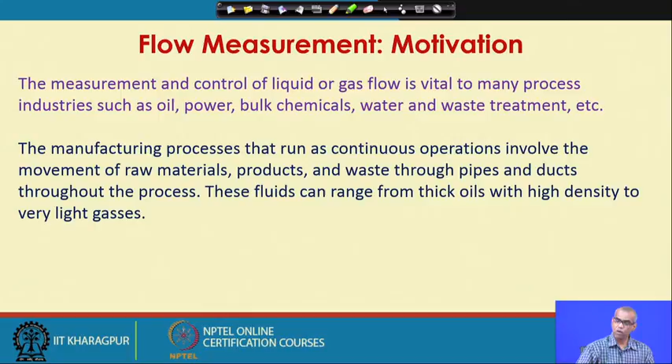The manufacturing processes that run as continuous operations involve the movement of raw materials, products, waste through pipes and ducts throughout the process. These fluids can range from thick oils with high density to very light gases. It is important that we know exactly how much fluid is passing through a point at any given time, for a safe and economic operation.

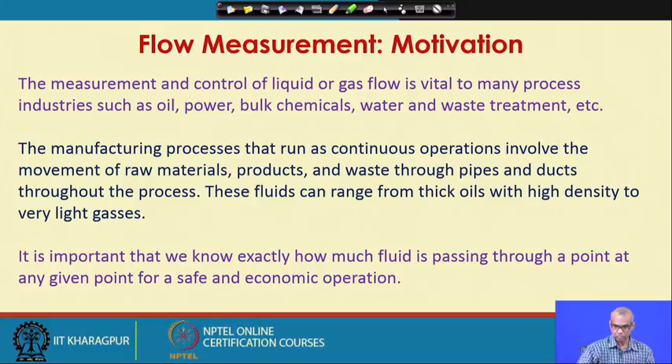It is possible that some flow measuring instruments work better with some groups of fluids and less well with others. It is obvious because you will be handling fluids which vary from very thick to very light. So there will always be flow measuring instruments which work better with some groups of fluids and less well with others. In this week, we will learn about various flow measuring instruments and their applications.

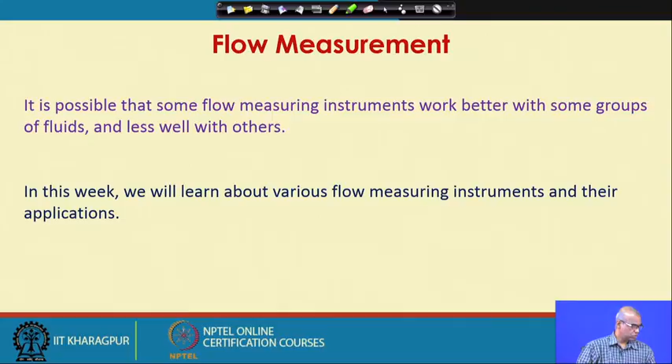So today we will classify various flow measuring instruments, and then we will talk about an important principle on which a certain class of flow measuring instruments are designed. This is known as Bernoulli's principle, so we will talk about Bernoulli's equation.

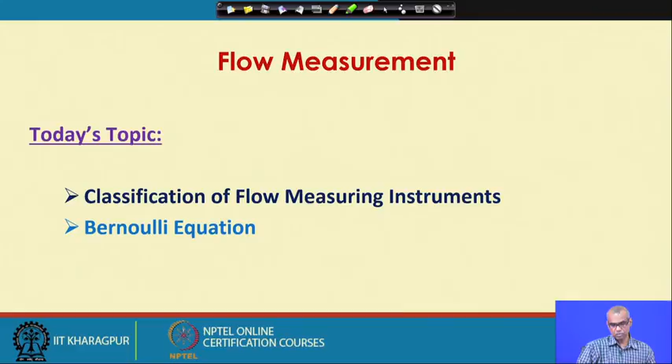Broadly, I classify the flow measuring instruments into two categories: one is flow of fluids in closed pipes, another the flow of fluids in open channel. Of course, flow of fluids in closed pipes finds many more applications, and under flow of fluids in closed pipes, we have classified various flow measuring instruments under 5 different categories.

First, constant area variable pressure drop meters. Under this, we will talk about orifice plate, venturi tube, flow nozzle and pitot tube. Then we have variable area constant pressure drop meter, and we will talk about rotameter.

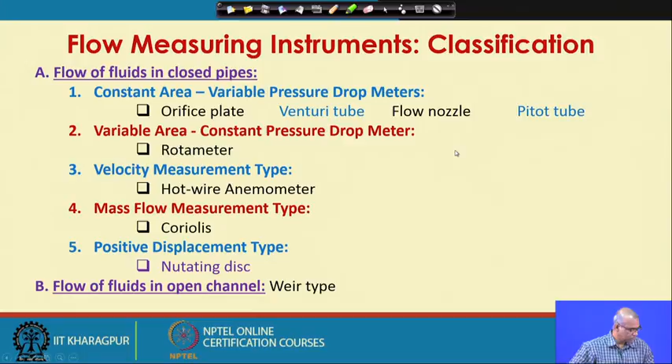Let us go through some basic principles. First, average rate of flow. In a flow through a pipe, the velocity of a fluid is the rate of flow of fluid particles in the pipe. The speed of particles in a fluid flow varies across the flow. At the walls, the velocity of the liquid particles is practically 0, and the particles have maximum velocity at the center. Thus, the average rate of flow is used in flow calculations.

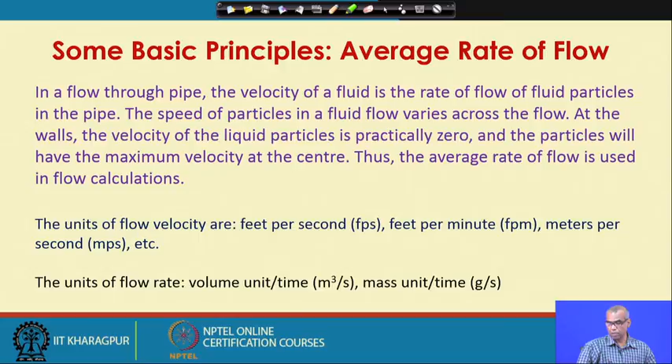The units of flow velocity are, say, feet per second or feet per minute, meters per second, etc. The units of flow rate, if it is volumetric flow rate, we will express as volume unit per time such as meter cube per second. If it is mass flow rate, we will express in mass unit per time such as gram per second.

Next we will talk about types of fluid flow. In laminar flow, the fluid travels as parallel layers known as streamlines that do not mix as they move in the direction of the flow. If the flow is turbulent, the fluid does not travel in parallel layers, but moves in a haphazard manner, with only the average motion of the fluid being parallel to the axis of the pipe.

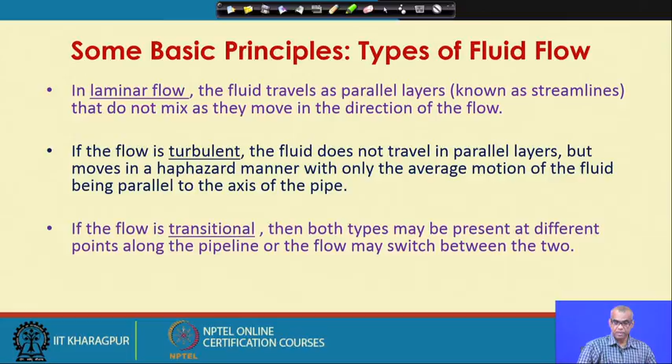If the flow is transitional, then both types may be present at different points along the pipeline, or the flow may switch between the two. In 1883, Osborne Reynolds performed a classic set of experiments to show that the flow characteristic can be predicted using a dimensionless number known as Reynolds number. The Reynolds number, expressed as Re, is the ratio of the inertia forces in the flow to the viscous forces in the flow, and can be calculated as dV rho divided by mu.

Here d is the diameter of the pipe through which flow takes place, v is the velocity, rho is the density of the fluid, and mu is the viscosity.

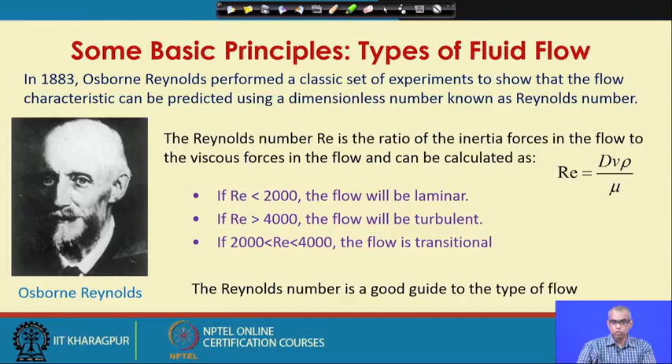If Reynolds number is less than 2000, the flow will be laminar. If Reynolds number is greater than 4000, the flow will be turbulent. If the Reynolds number lies between 2000 and 4000, the flow is transitional.

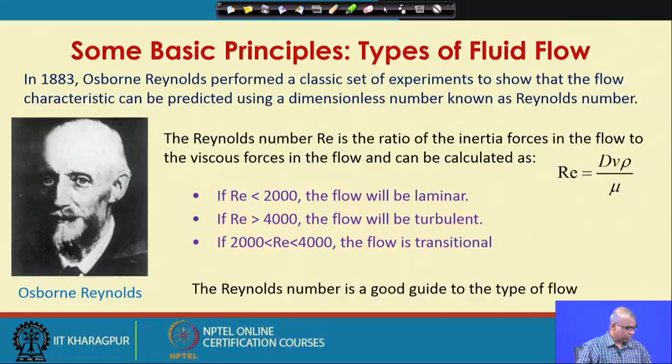Thus, the Reynolds number is a good guide to the type of flow. This schematically shows laminar flow - see how these fluid particles are moving in parallel with each other. This is turbulent flow, where it is all haphazard, and this is transitional, showing a mixture of laminar and turbulent flow.

So, these are the velocity profiles.

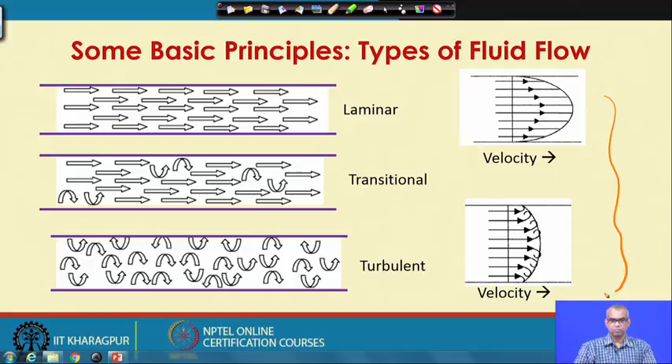Now, we will talk about the continuity equation, which plays a very important role in flow measurement. The continuity equation states that if the overall flow rate Q in a system is not changing with time, the flow rate in any part of the system is constant.

Consider a flow through a pipe where the cross sectional area is changing from A1 here to A2 here. The velocity is V1 here, the velocity is V2 here. The pressure is P1 here, the pressure is P2 here. This is point 1, this is point 2. So, the velocity and pressure at point 1 are different from the velocity and pressure at point 2.

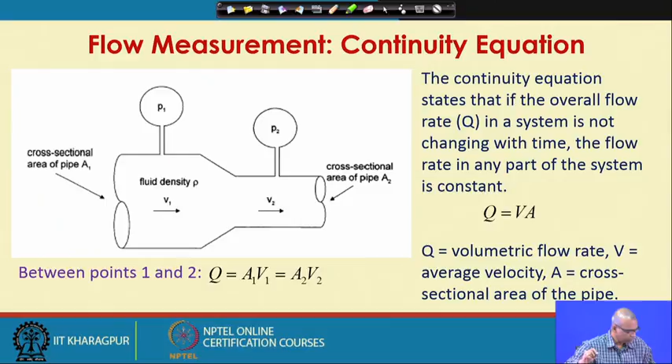As an example, let us consider if a pipe goes from 9 centimeter diameter to 6 centimeter diameter, and the velocity in the 9 centimeter section is 2 meter per second, what is the average velocity in the 6 centimeter section? Here you have 9 centimeter diameter and velocity 2 meter per second, and the diameter is 6 centimeter here - you have to find out the velocity. This is a straightforward application of Q equal to A1 V1 equal to A2 V2.

You can find out V2 as A1 by A2 into V1. A1 is pi d square divided by 4, A2 is pi d square divided by 4. You can also write it as pi r1 square divided by pi r2 square into V1.

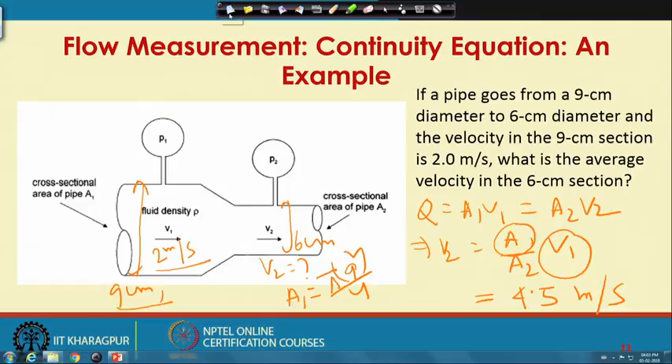Next, we will start our discussion on constant area variable pressure drop meters. Under this category, we will talk about orifice plate, venturi tube, flow nozzle, and pitot tube.

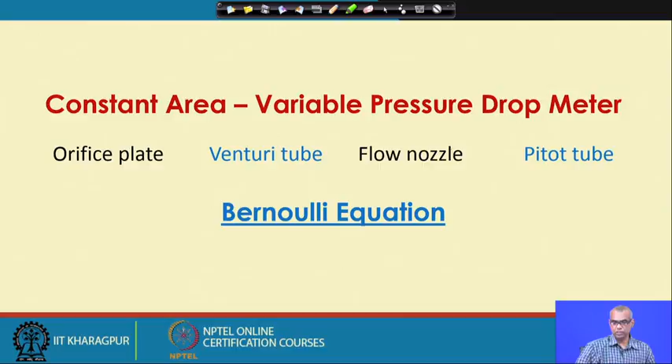To understand the working of constant area variable pressure drop meters, we must talk about Bernoulli's equation first. The Bernoulli's equation is an equation for flow based on the law of conservation of energy. This is the starting point for understanding the principles of the variable pressure flow meter - it is basically a statement of conservation of energy.

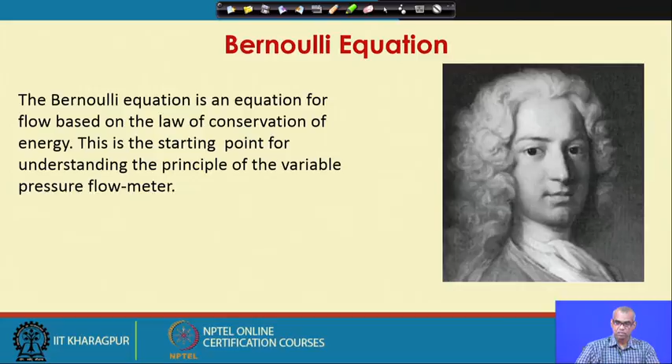Bernoulli's equation says that between points 1 and 2, the sum of pressure energy, kinetic energy, and potential energy is constant. At point 1, the pressure energy is P1 by rho g, the kinetic energy is V1 square by 2g, and the potential energy can be expressed as potential head H1.

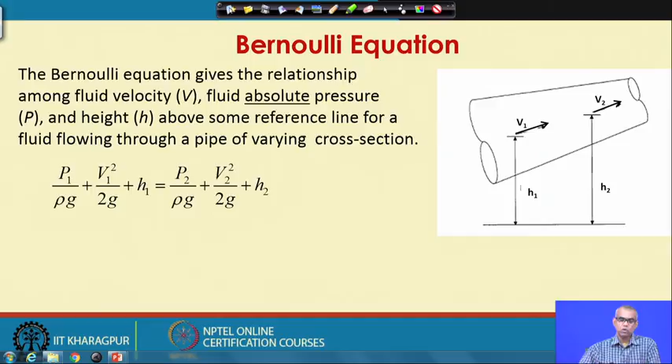So P1 by rho g plus V1 square by 2g plus H1 is equal to P2 by rho g plus V2 square by 2g plus H2. The sum of pressure energy plus kinetic energy plus potential energy is equal to a constant. Here P1 is absolute pressure, V1 is the fluid velocity, rho is the density of the fluid, g is acceleration due to gravity, and h is height from the reference line.

This Bernoulli's equation is applicable to incompressible fluids, steady flow along a streamline, no energy loss due to friction, and no heat transfer. Remember, the sum of pressure energy, kinetic energy and potential energy is equal to a constant.

If I apply the Bernoulli's equation: P1 by rho g plus V1 square by 2g plus H1 equal to P2 by rho g plus V2 square by 2g plus H2. Between 1 and 2, since H1 and H2 are the same, what I get is P1 by rho g plus V1 square by 2g equal to P2 by rho g plus V2 square by 2g.

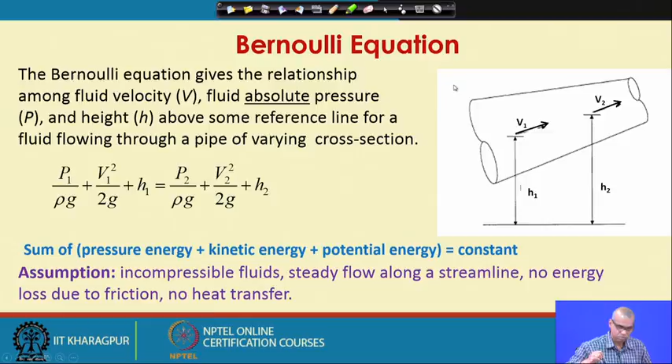So if you rearrange this, you get P1 minus P2 by rho equal to V2 square minus V1 square by 2.

If we apply the continuity equation between point 1 and point 2, I can write A1 V1 and A2 V2, they will be same as the volumetric flow rate Q. Now if I combine these two, I can write Q equal to A2 V2, and an expression for V2 can be obtained from this. So I get Q equal to A2 V2 equal to A2 by square root of 1 minus A2 by A1 whole square, into square root of 2 into P1 minus P2 by rho.

Thus, change in flow rate through a restriction can be measured in terms of the differential pressure across it, that is P1 minus P2.

So what I did is: I considered a flow through a horizontal pipe of varying cross section, so H1 equal to H2. I applied the Bernoulli's equation between point 1 and point 2 to get this; I applied the continuity equation at point 1 and 2 to get this; then I combined these two equations to get this.

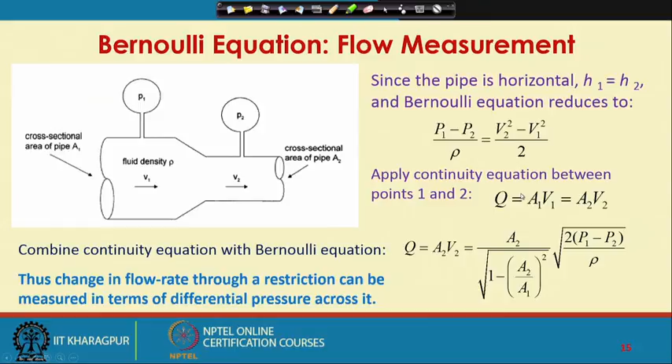In practice, we add a correction factor CD, known as the discharge coefficient, which depends on Reynolds number. So this is the equation we got by combining Bernoulli's equation and the continuity equation — this is the idealized volumetric flow rate.

In practice, we add a correction factor known as CD, the discharge coefficient, and QA, the actual flow rate, will be this Q multiplied by the discharge coefficient CD. So this is the expression I get for the actual volumetric flow rate through a pipe where we have a flow restriction; P1 minus P2 is the pressure drop across the flow restriction.

The velocity of approach factor is this term. Velocity of approach is 1 by square root of 1 minus A2 by A1 whole square. Similarly, the flow coefficient is this term: CD by square root of 1 minus A2 by A1 whole square.

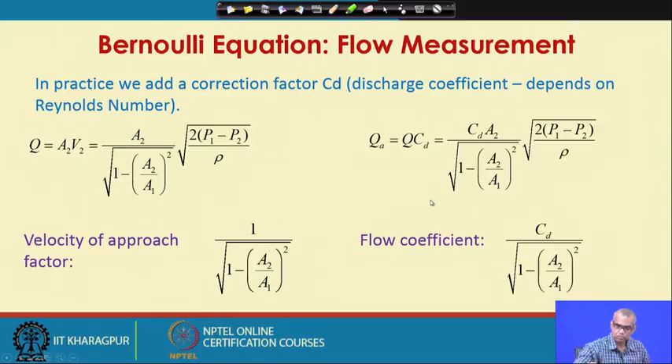For laboratory experiments, a U-tube manometer may be used to measure the differential pressure head delta H, because we know P1 minus P2 equal to rho g into delta H.

So this is the pipe of varying cross section, so you have a flow restriction here. A U-tube manometer can be used to determine the differential pressure that occurs between point 1 and point 2.

So this P1 minus P2 can be replaced as rho g delta H. This rho and this rho get cancelled, and what you get is QA is this. So this part becomes this part, because P1 minus P2 equal to rho g delta H.

However, for industrial practice, use of a U-tube manometer may not be convenient, so usually a diaphragm is used for measuring the pressure drop. A diaphragm with pressure on each side will deform according to the pressure difference. We have talked about the diaphragm pressure measuring instrument while discussing pressure measuring instruments.

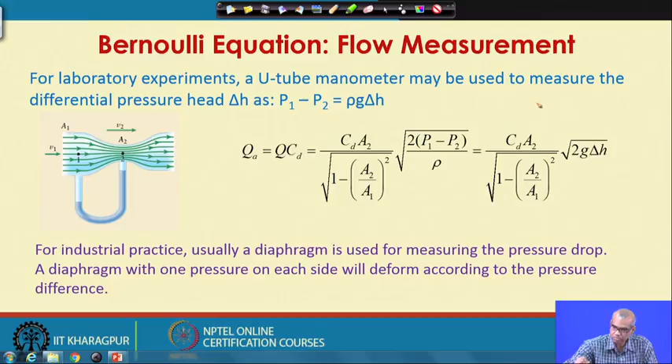Now we talk about two important aspects of flow measuring instruments. They are known as rangeability and turn down ratio of flow meters. Rangeability refers to the minimum and maximum measurable flow rates with specified accuracy. For example, if the maximum flow rate is 100 liter per minute and the minimum flow rate is 10 liter per minute, the rangeability is 10 to 100.

Turn down ratio conveys the same information as rangeability, but in a slightly different way. Turn down is the ratio of maximum flow to minimum flow. So basically turn down ratio is maximum flow rate divided by minimum flow rate. For the same flow meter used in the rangeability example above, whose maximum flow is 100 liter per minute and minimum flow rate is 10 liter per minute, the turn down ratio will be 100:10.

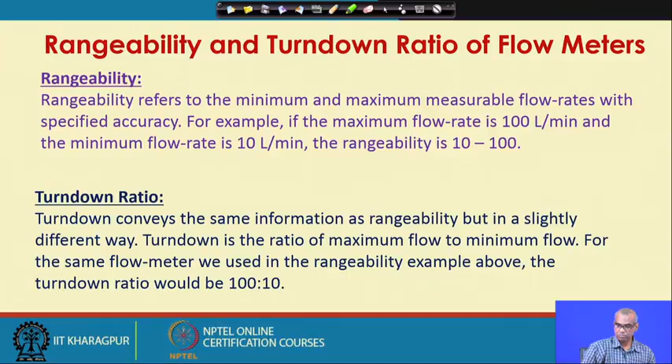Let us talk about turn down ratio a bit more. If a given flow meter has a 50:1 turn down ratio, the flow meter is capable of accurately measuring down to 1/50th of the maximum flow. Thus, if the flow meter has a full scale rating of 20 liter per minute, the flow meter will measure down to 0.4 liter per minute of flow, because 1/50th of 20 liter per minute is 0.4 liter per minute.

If the calibrated high flow is 25 liter per minute, then the lowest that can be measured is 0.5 liter per minute. Why 0.5 liter per minute? Because it is 1/50th of 25.

If the application requires that the calibrated minimum flow is 0.1 liter per minute, then the maximum flow rate that can be measured is 50 times 0.1 liter per minute, that is 5 liter per minute. So this is how you can interpret the turn down ratio.

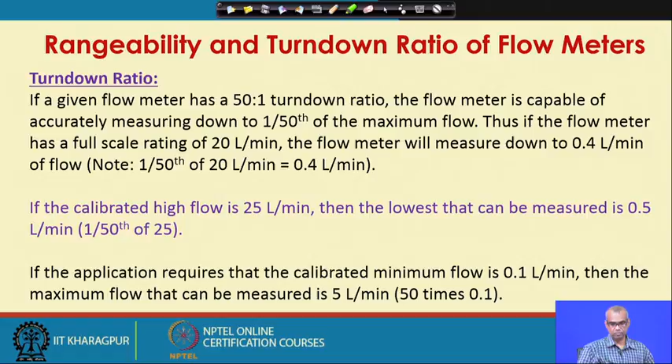I will give you the sketch of the solution procedure. First, let us try to find out the velocity at point 3. To find velocity at point 3, we can write Bernoulli's equation between point 1 and point 3 as: P1 by rho g plus 0 plus h equal to P3 by rho g plus V3 square by 2g plus 0.

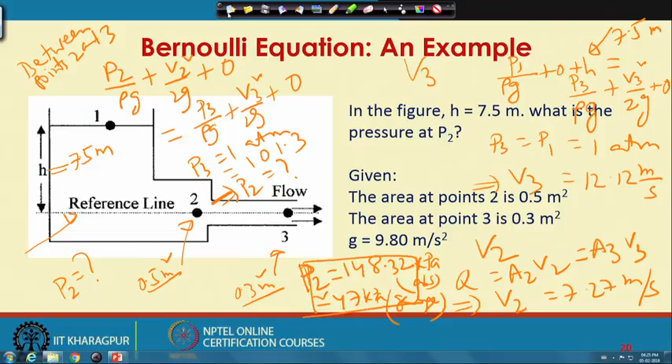So this is how you can solve this problem. First you apply Bernoulli's equation between point 1 and point 3 to calculate V3. Once you get V3, you use the continuity equation between point 2 and 3 and calculate V2. So at this stage I have P1, P3, V2, V3. Now between point 2 and 3 I use Bernoulli's equation and calculate P2.